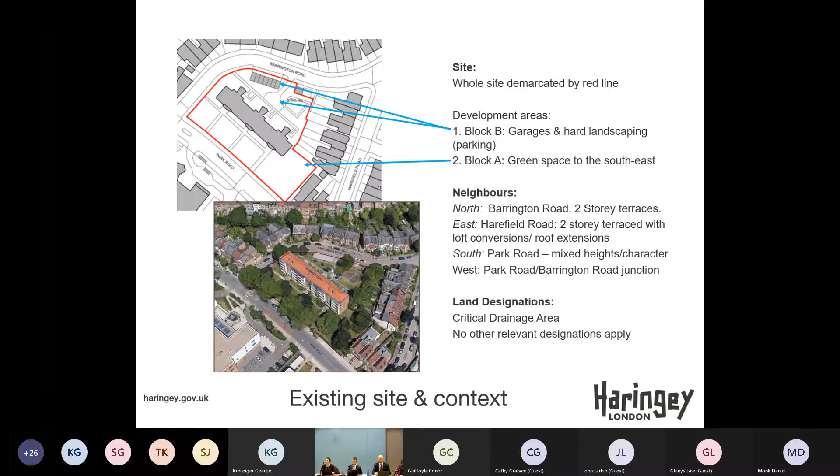In terms of planning land designations, the site is in a critical drainage area, but there are no other relevant designations.

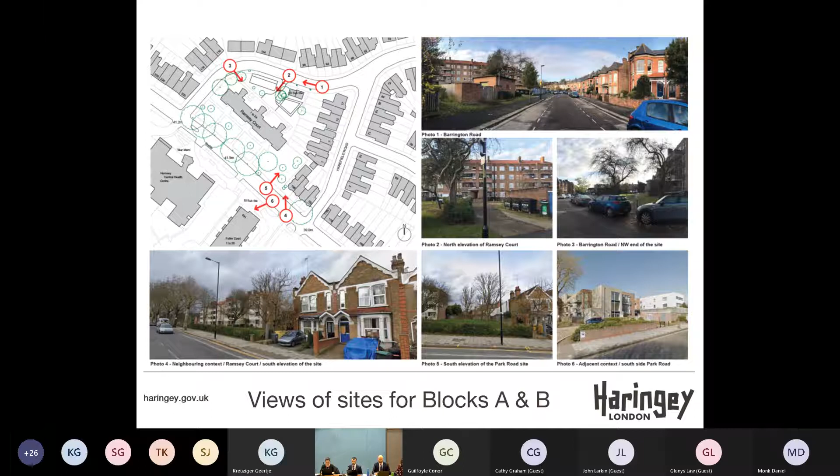On this slide, you can see a view of different aspects of the site, demarcated corresponding to the numbers. The image on the bottom left shows the view from Park Road adjacent to number 186, looking towards the end of Ramsey Court. The image on the top right shows the garages in the foreground and Ramsey Court in the background.

In terms of the land use principle of development, the key driver is policy DM20, which notes that there is some loss of open space. However, the site is not a designated open space in the local plan in planning policy terms. That means while it is an estate landscape amenity space, it is not protected open space in terms of parkland and so forth. The loss of open space must be balanced against the qualitative gains for the site and the Ramsey Court residents.

These gains include the siting of the new block and its communal garden, which provide an open and flexible space with multifunctional potential, a safe and usable play space with sitting spaces, sensitive to the remaining open space, so the scheme avoids harm to the character and function of the wider estate.

It provides increased landscaping cover to the rear — by that we mean the access lane, the parking spaces and the hard standing, which will be grassed over compared to existing. It also provides biodiversity and ecology gains, and would involve improvements to the boundary planting for the neighbouring Harefield Road residents. On balance, in terms of DM20, the scheme is considered to comply with its aims.

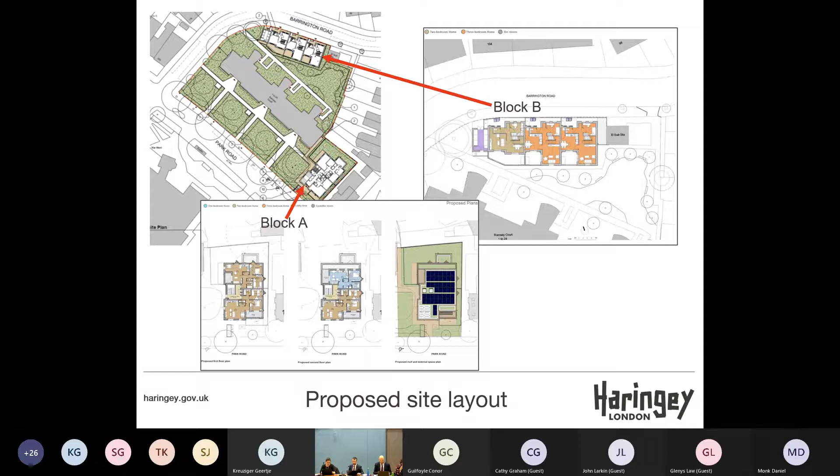The scheme represents a contextual design which responds to the existing character in terms of building scale, form and materials. It has been subject to a lengthy review and testing of various design options with officers, and the standard of accommodation complies with, and in many cases exceeds, the relevant space standards and so forth.

Block B, to the bottom right, shows that the scale, the typology in terms of its height and pitched roof, its architectural features and its materials reflect the housing along Barrington Road. Block A, on the left of the drawing, shows the step in scale between Ramsey Court and the adjacent terrace of number 186.

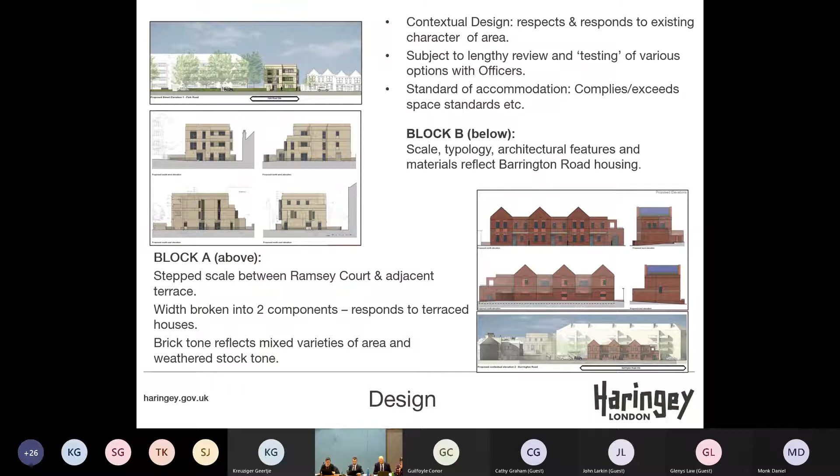Its width has been broken into two different components on the left and right side to articulate it and to relate to the housing adjacent, and the brick tone reflects the mixed varieties of the area and the weathered stock.

In terms of the housing mix, tenure and quality, the scheme comprises 9 homes. 7 of these would be affordable social rent. Block A would be 100% social rent, comprising 2 1-bed, 3 2-bed, and 1 3-bed ground floor wheelchair accessible unit.

Block B, comprising 2 market sale houses and 1 social rent house, will have 1 2-bed and 2 3-bed, 5-person houses. The mix will be mostly 1 and 2-bed units, but this is acceptable given its location near Crouch End town centre, served by public transport routes and within walking distance to amenities. It would contribute to much needed housing, particularly in the social rent sector and for family-sized units too.

The size, mix, tenure and quality of accommodation is acceptable, meeting the relevant planning policy standards. All units have external amenity space, and the scheme would introduce improved communal grounds for existing and proposed units.

One of the key aspects of the scheme is the landscaping, trees, ecology and biodiversity. The scheme would involve removal of 9 trees, categorised in accordance with British standards: 3 category B and 6 category C. The council's tree officer has assessed the scheme, and while some trees are category B, overall they are not considered of particularly high value compared to what is proposed.

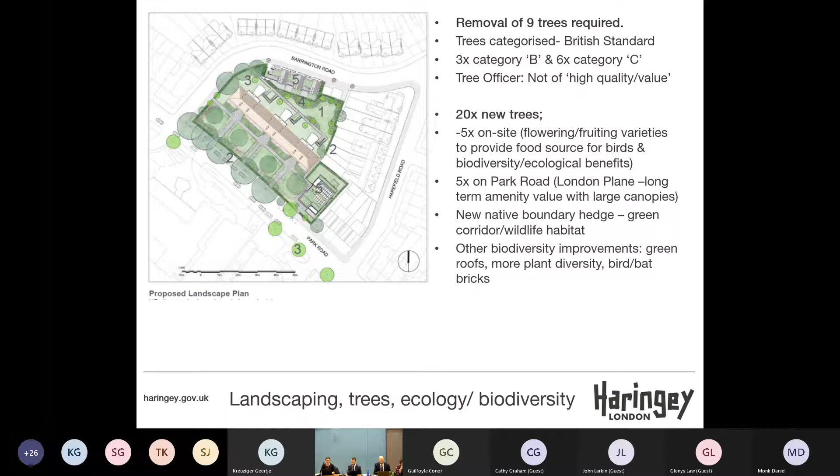The proposal outlines a scheme for 20 new trees - 5 along Park Road and 15 on site. There is an error on that slide. The scheme would introduce some London plane varieties with high amenity value for their canopies, new native boundary hedging, and other biodiversity improvements such as green roofs, more plant diversity, and bird and bat bricks.

In terms of transport, the scheme has a public transport accessibility level value of 2 and is located within a controlled parking zone. Because of this PTAL value and CPZ location, new units would not be eligible for car-free restrictions, where we would remove eligibility to apply for a resident permit. The scheme is alongside bus routes on Park Road and near Crouch End town centre.

At present we have 10 existing car parking spaces, comprising 7 in garages and 3 marked out spaces, including 1 accessible space. Under the proposal, the 7 garages would be lost to houses and those spaces removed. The 3 marked out spaces would also be removed, but the 1 accessible space would be re-provided on Park Road, in addition to 1 additional new Park Road accessible space to cater for the ground floor flat in Block A.

Car ownership census data shows the predicted parking demand for here is 7 vehicles. A parking stress survey has been undertaken to determine capacity for displaced parking and demand for new unit parking. In total, the produced parking stress, comprising the lost garages and new units, is between 81 and 101%. This is the worst case figure because not all garages may necessarily be occupied and used for parking at the moment.

This figure also includes an assessment based on vehicles taking 6 meters to park on the street, as opposed to a reduced distance which is more common. The actual stress is likely based on a shorter 5.5 meter parking space length, giving a stress figure in the region of 90 to 91%. This is still above the 85% threshold considered to comprise parking stress, but it is acceptable on balance due to real life demand.

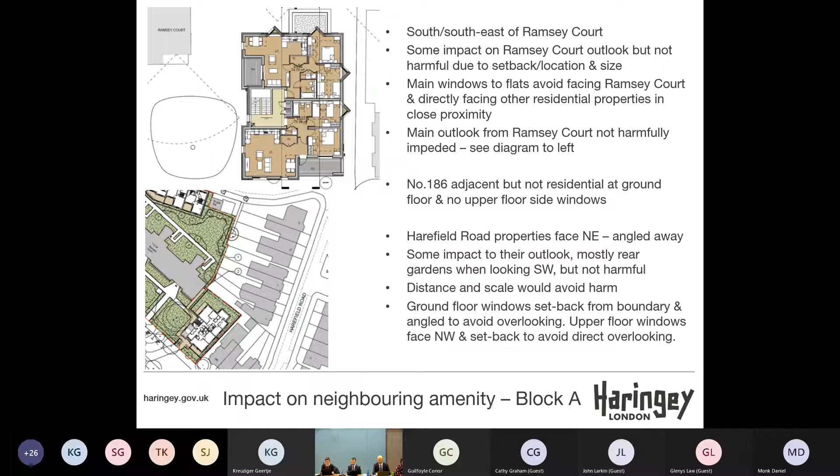In terms of Block B, these two-storey properties would have some impact. The main impact would be on the Ramsey Court residents. In terms of Barrington Road, the distance and the scale would avoid any amenity harm. In terms of the Harefield Road properties, the properties will be between 16 and 28 metres from the rear gardens and rear building lines of those properties, which would avoid harm.

In terms of the Ramsey Court residents, there is already an existing pedestrian parallel path between the new proposal and the Ramsey Court block, which serves the block and runs parallel to them. The closest distance between Block B and Ramsey Court would be approximately 10 metres, but the rest of the block would be angled to pull away from those windows, meaning that most building and windows would be between 12.5 and 22 metres away. The ground floor gardens on Block B would have boundary fences to limit the privacy impacts.

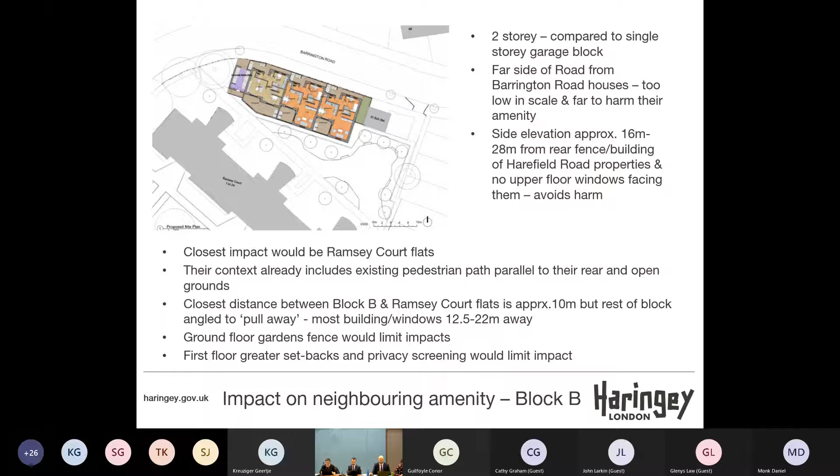The first floor would be set back. The first floor would be interspersed to be set back with privacy screening in between.

The current slide shows Block B with the ground floor gardens bounded by a fence, and the first floor including setbacks with balcony, terraces and screening.

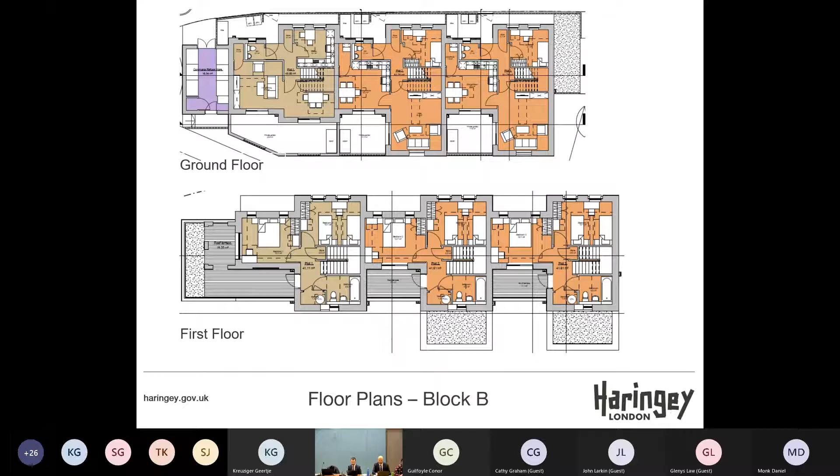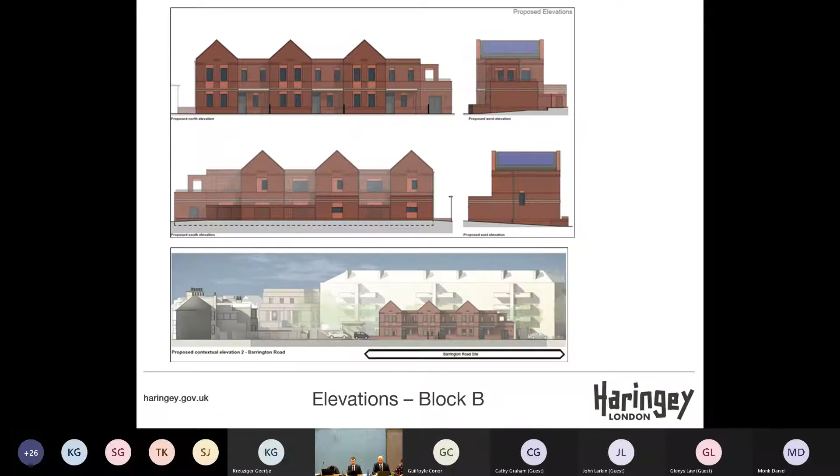In summary, the scheme would provide affordable housing for 7 out of 9 units. In terms of land use and design, the scheme is acceptable and provides a contextual response with a good quality landscaping scheme. In terms of standard of accommodation, the units have generous layouts and sizes, an acceptable tenure and mix. They meet and exceed space standards. Their dual aspect or greater, provide for good daylight and outlook, generous internal layouts, and good amenity and child space provision.

In terms of neighbouring amenity impacts, the scale, the layout and the orientation of the buildings and the windows and the distances between neighbours and the proposed blocks are acceptable to protect neighbouring amenity. In terms of transport, the traffic generation would not be materially harmed in terms of highway safety or parking conditions. Flood risk impacts would be acceptable. The scheme lies within flood zone 1, which is the lowest risk.

Other issues include air quality and land contamination. There are no unusual issues identified here, and planning conditions have been imposed to manage these. In terms of sustainability, the scheme is an exemplar scheme of net zero in terms of carbon emissions, and because of this, there will be no carbon offset required.

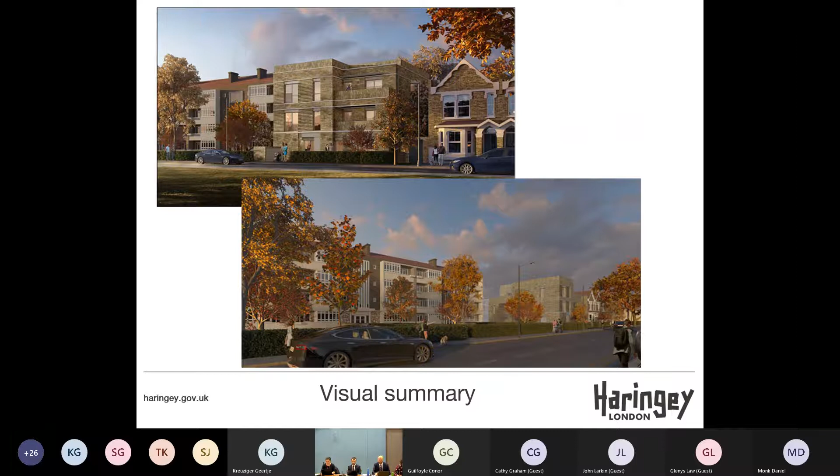And in conclusion, you can see a visual summary of Block A next to Ramsey Court in this slide. And on the following slide, you can see Block B facing Barrington Road. And so the recommendation is to grant planning permission with conditions.

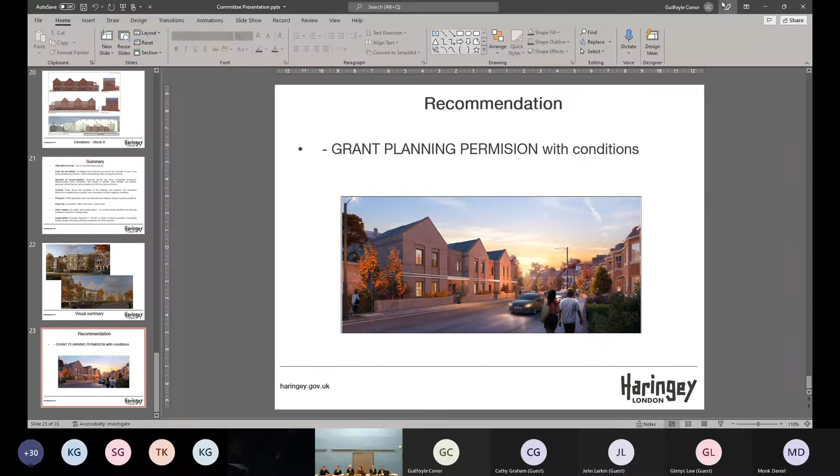Thanks, Chair. Sorry, bear with me. Yeah, so a couple of points.

I didn't really understand your resolution on the parking conditions if you're saying that the stress test is going to go up to 101% potentially, but there's going to be no material difference. I can't get my head around that. It also sits right on the boundary of a CPZ and no CPZ, so I'd like to understand what the stress test actually covered. Was it a radius around the site, or was it the particular CPZ that the site just falls within?

Also, I don't think you referenced, but in the pack, I think it makes reference to daylight impacts on the units and that they are outside what is deemed guidelines acceptable. So if you could potentially comment on that as well.

Also, it says that it's flood risk zone 1, the lowest. This area flooded twice in the summer quite severely. It sits on a culvert. I don't understand how it can be risk 1 when the council knows full well that it floods.

So what provision is being put in place with this development to mitigate that, beyond what seems like very basic drainage measures that would be in any other development? That's it for now, thanks.

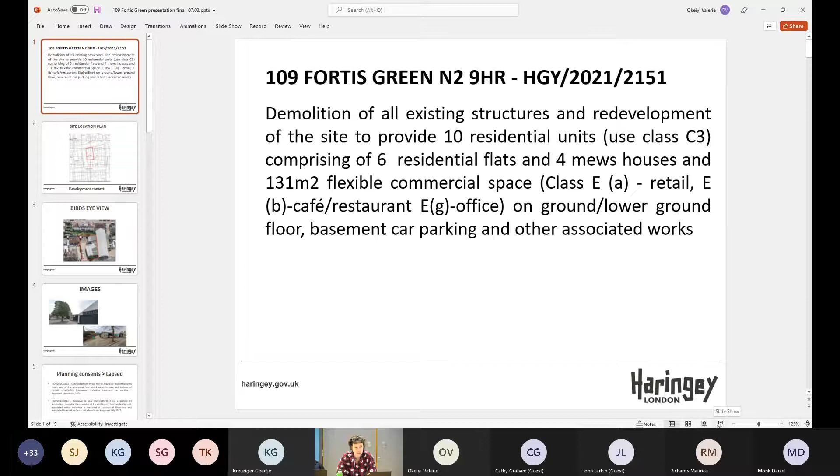Thank you. Okay, Ms. Okeiyi, over to you to present. Good evening. The proposal is for demolition of all existing structures and redevelopment of the site to provide 10 residential units, comprising 6 residential flats and 4 mews houses, and 131 square metres of flexible commercial space on ground and lower ground floor, basement car parking and other associated works.

This is the site location plan. The site is highlighted in red, and the site is located within the Fortis Green Conservation Area.

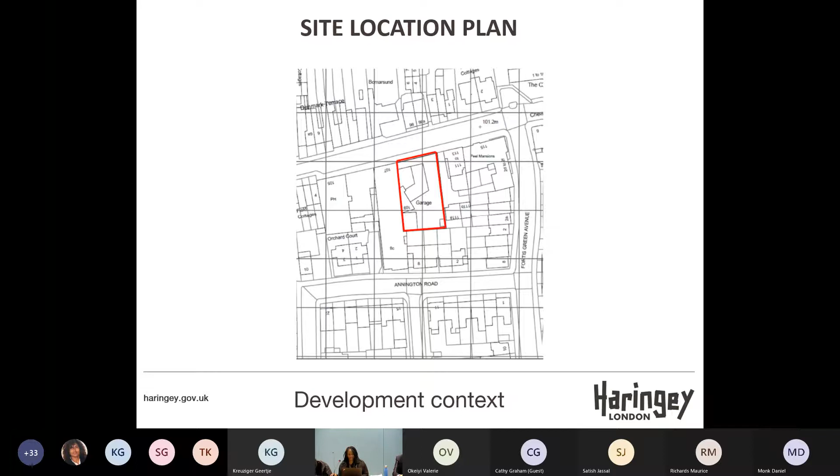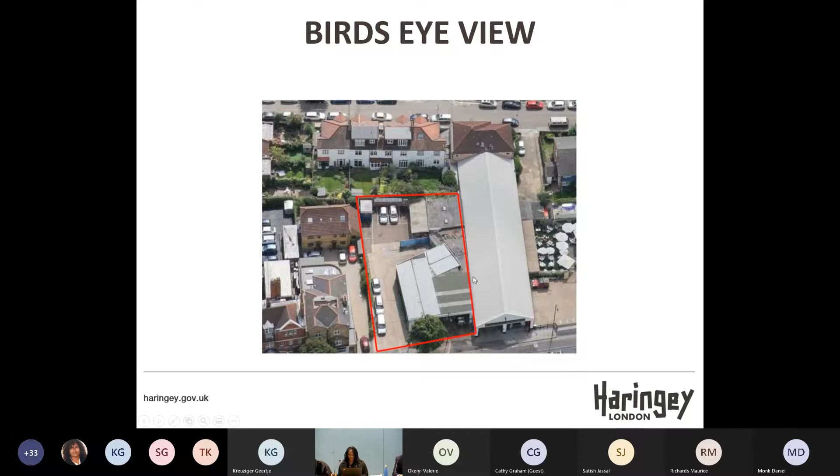This is a view of the site from Fortis Green Road, or Fortis Green, sorry.

Planning permission was previously approved by the Council's Planning Subcommittee in September 2016. This was followed by a minor revision to this approved scheme that was granted in July 2017. Neither planning permission was implemented, and both have now since lapsed.

The current proposal, which is almost identical to the last permission, is for 10 residential units, 5 family size units, a financial contribution towards affordable housing within the borough, 131 square metres of flexible commercial floor space, 10% wheelchair accessible units, private communal amenity space provision comprising gardens, balconies and child play space, landscaping, disabled parking provision, cycle parking and electric car charging points.

The changes since the last permission approved in 2017 include minor changes to the internal layout of the commercial unit, Mews Houses and Apartment 1, a reduction in the commercial unit floor space by 22 square metres, external changes to the front and rear elevation of the main street facing building, minor changes to the housing mix, and a financial contribution towards affordable housing within the borough.

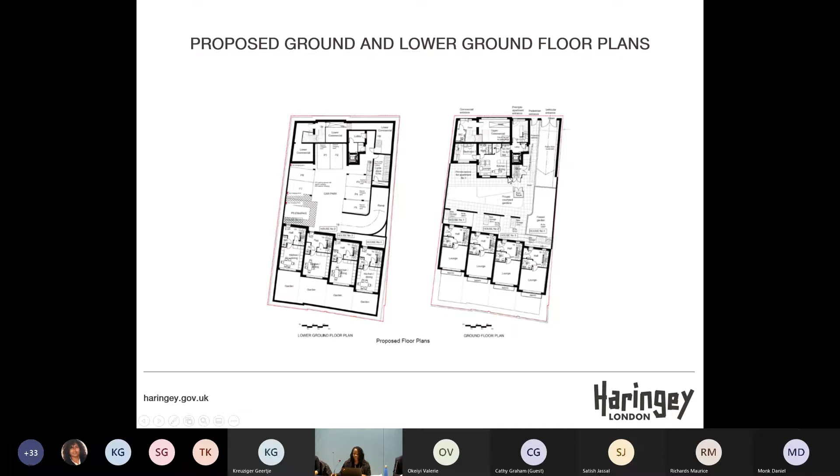This is the ground floor plan to the right, where there is separate access to the commercial unit, residential flats above, and Mews houses to the rear, private courtyard garden and recycling and refuse area.

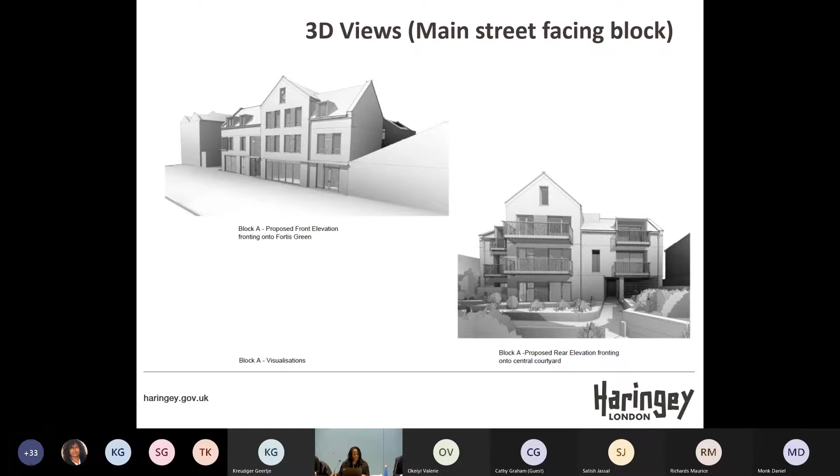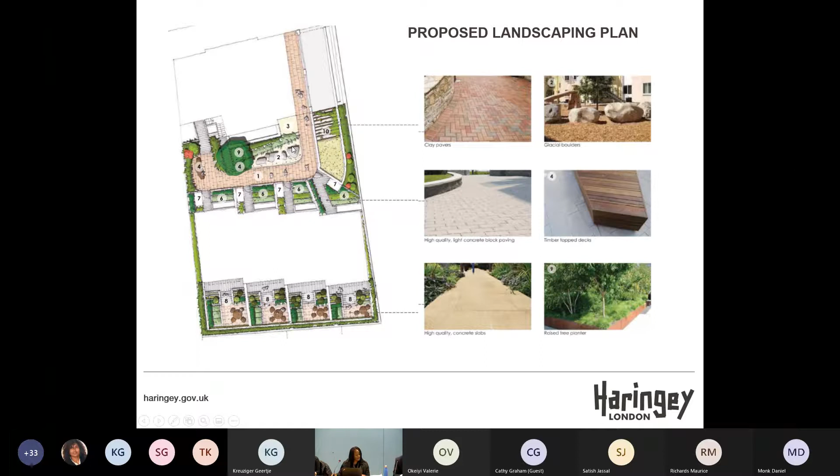Officers consider that the changes to the proposed scheme in comparison to the previous approved development are minor, and the change in policy context does not affect the assessment of planning merits of this proposal. The proposed scheme also provides a financial contribution towards off-site affordable housing provision within the borough, where the previous scheme did not. Accordingly, the proposal is recommended for approval.

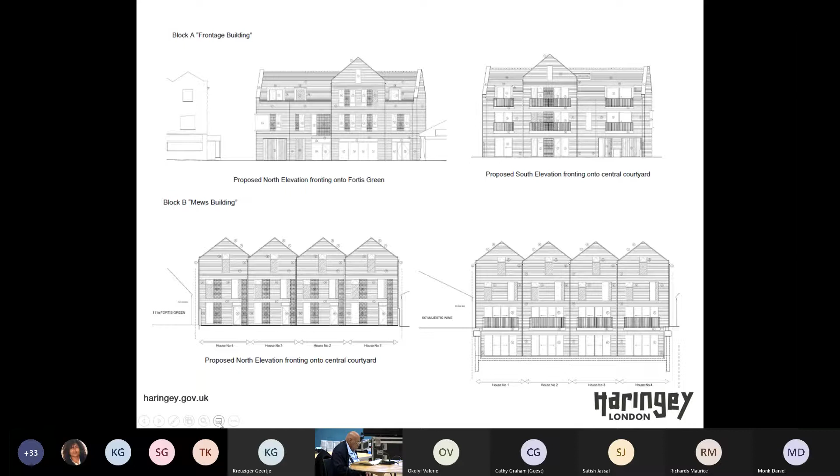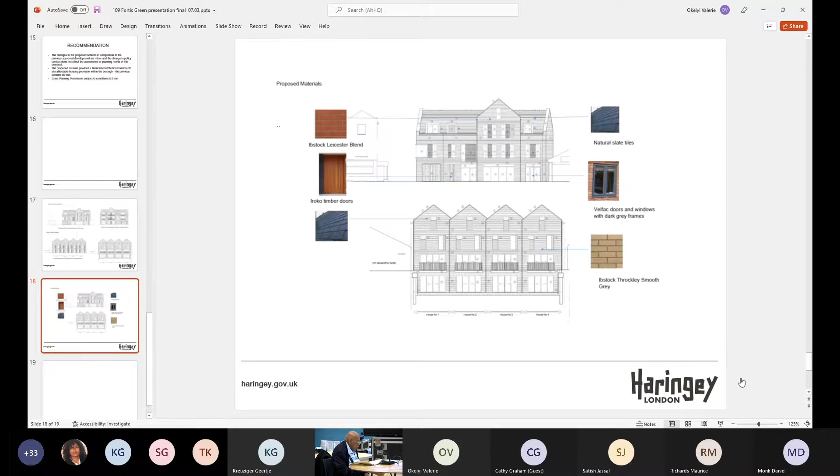I'm concerned about the proposal to give, is it 200 and something odd thousand, as a contribution to development outside that particular geographical area. We get this from time to time. Why is it that council housing is not supported in places like Fortis Green, but pushed to some other part of the borough, mainly the eastern part? Because this is really what's behind this policy. You simply don't build enough units in a development such as this, and then you say, oh well, they can go elsewhere, take this little money with you and get out the way. It is, in my mind, not acceptable.

I suspect the officers have got nothing to do with it. It's really a matter of policy which the council has laid down, not strictly within their tenure. But I'm appalled with this. I was involved in the previous development that granted permission to the police station, and the same thing happened there. You don't get a full share of the cake. You say, well, go elsewhere and take this money, you can do what you like with it. Not good enough. We should be able to provide adequate housing from a development such as this, which has shared tenancies from people from this side of the borough as well as the west side of the borough.

Mr. Krzyszowski: Thank you, Chair. I can confirm, as the Chief Planner, we do control how we spend Section 106s across the borough, and we can spend Section 106 money for affordable housing in the west of the borough as well as the east, and that will quite possibly be the case with this one as well. We do spend it on smaller schemes in the west of the borough, and on buying properties that can be used for affordable housing as a net increase in affordable housing. So contributions in the west of the borough can be put to good use for new affordable housing, and I make sure that Section 106s are spent appropriately.

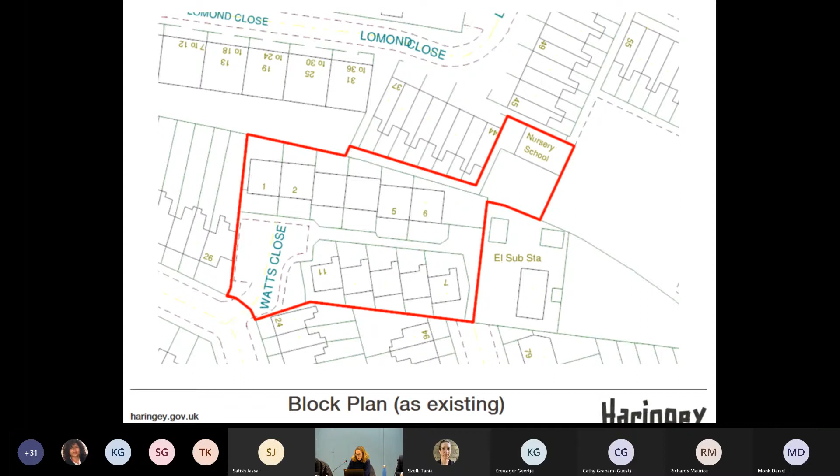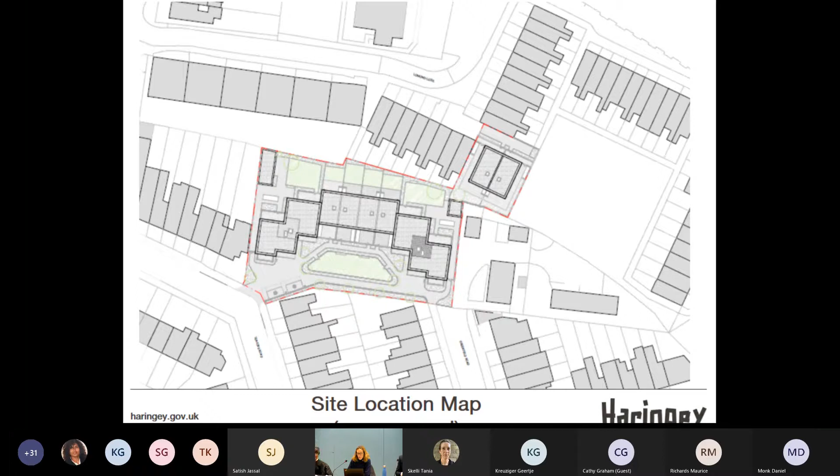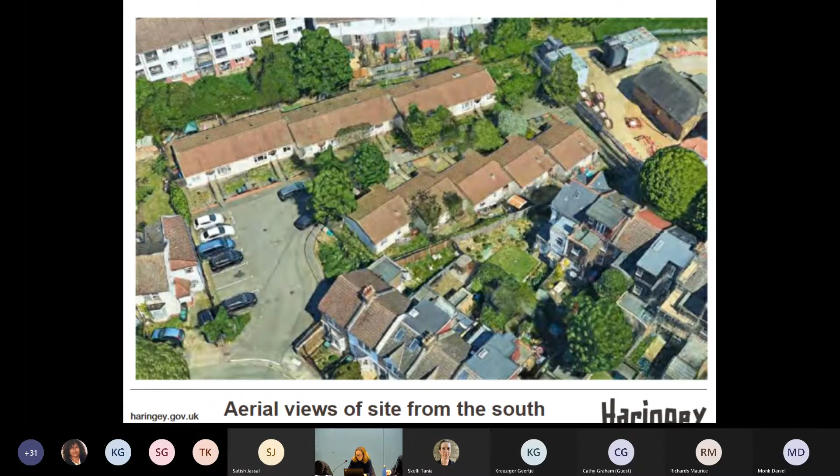This is an aerial view of the site looking from the south, onto single-story bungalows accessed from the vehicle entry on Seaford Road in the bottom left corner. The community hall would be in the top right corner, just off this photo.

The main issues covered under this proposal are the principle of the development, design and impact on the character and appearance of the surrounding area, landscaping, public realm, amenity and play space, housing mix, tenure and quality of accommodation, impact on neighboring amenity, transport, parking, waste, recycling and servicing, and sustainability, energy and climate change.

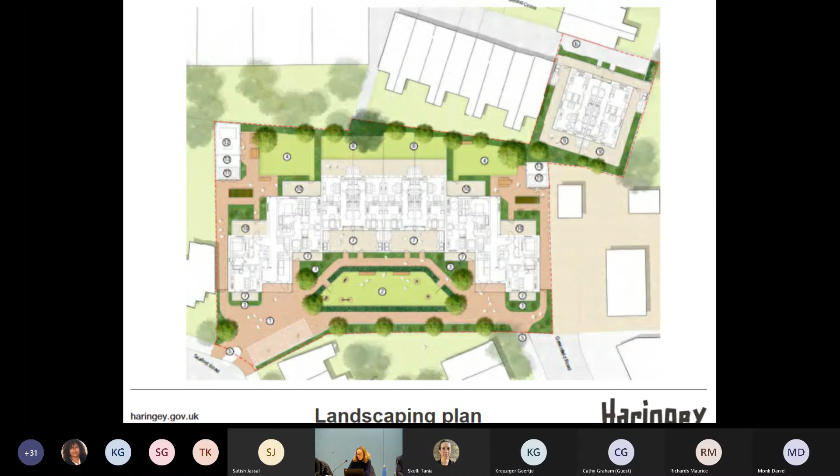Landscaping and public groundworks to complement the building are proposed, along with tree replacement. In front of you is the landscaping plan, with communal shared space to the front on the south, and at the back some communal outdoor space as well as private gardens to the townhouses. The pair of houses to the northeast have their own shared private gardens as well.

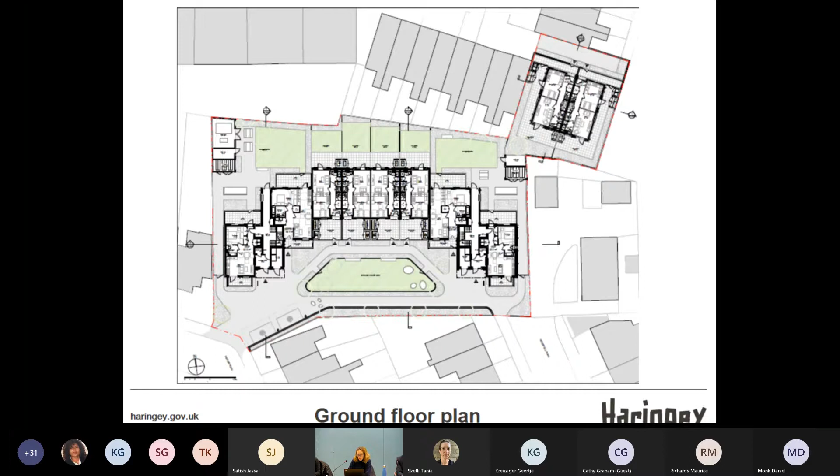This is a floor plan of the ground floor level of the entire development, with cycle storage and refuse storage shown within the ground floor, cycle storage at the back and sides, and for each individual townhouse as well. This slide shows the main access points.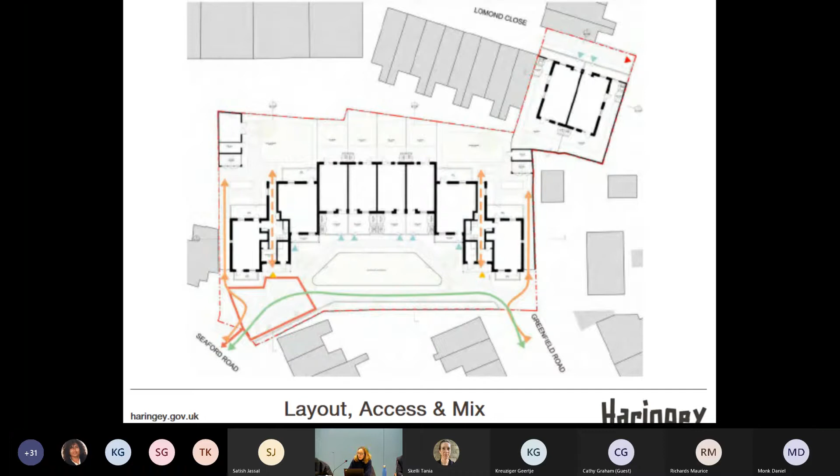The pair of new houses instead of the community hall to the northeast is accessed from Lomond Close, and the main mix of flats and houses is accessed from Seaford Road by car for deliveries and the two accessible parking bays, with pedestrian access as existing still provided from Greenfield Road.

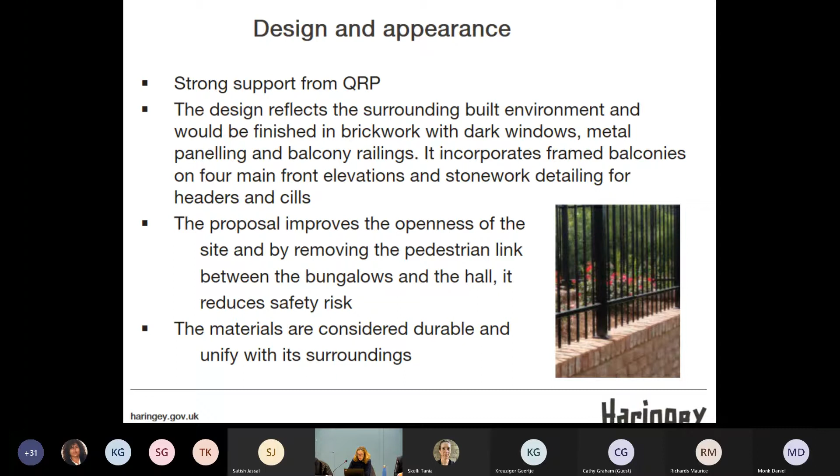The proposal has received strong support from the QRP. The design reflects the surrounding built environment and would be finished in brickwork with dark windows, metal paneling and balcony railings. It incorporates framed balconies on four main front elevations and stonework detailing for headers and sills. The proposal improves the openness of the site by removing the pedestrian link between the bungalows and the hall, thereby reducing safety risk. The materials are considered durable and unify with the surroundings.

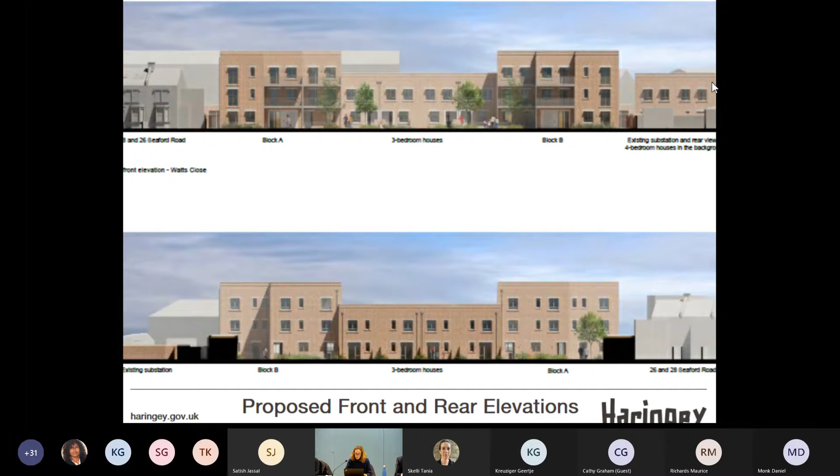These are the proposed front and rear elevations of the main section, with the 2 pair houses on Lomond Close shown with the rear in the right corner.

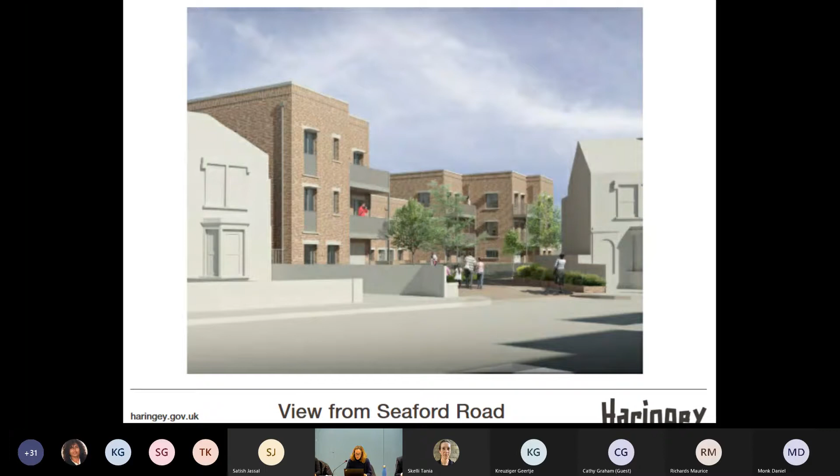This is a 3D view from Seaford Road onto the front elevation of the main section of the development.

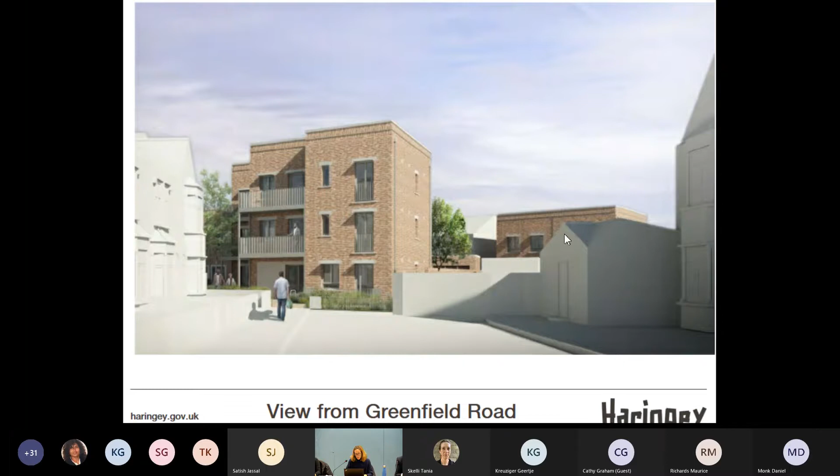This is showing the development from Greenfield Road, with the substation to the right and the rear of the Lomond Close buildings behind.

This is showing the frontage of the proposed buildings on Lomond Close.

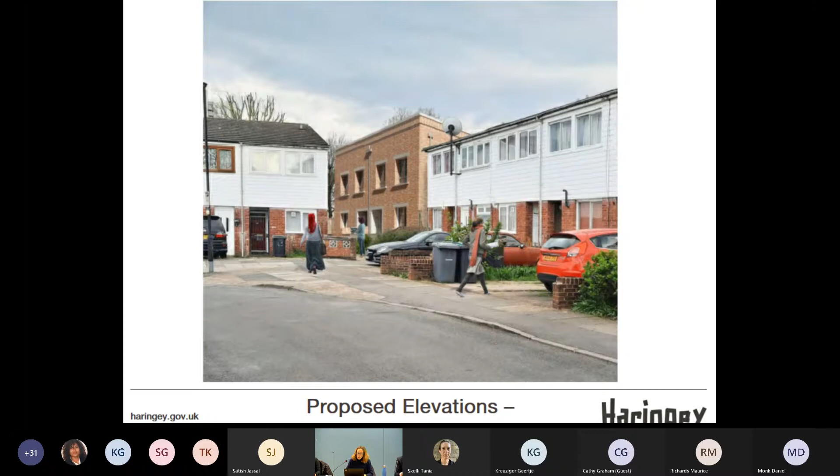With regards to landscaping, the development includes 1 new play area to the front of the site, private gardens, communal gardens, improved pedestrian zones, limited vehicular access, and improved community safety.

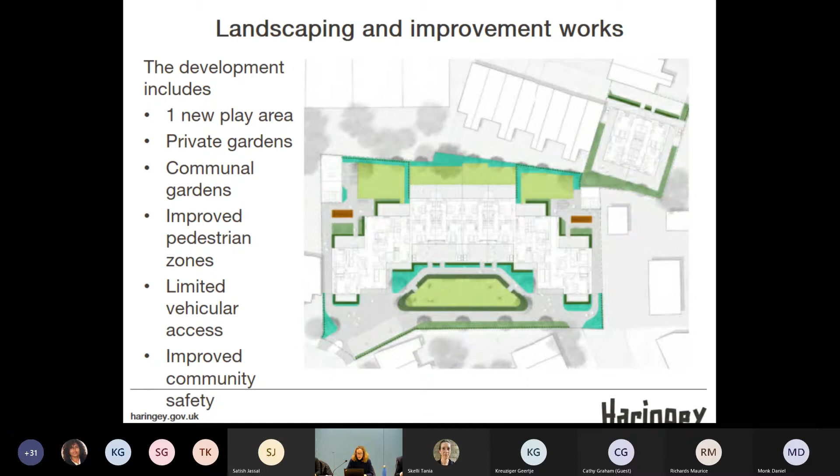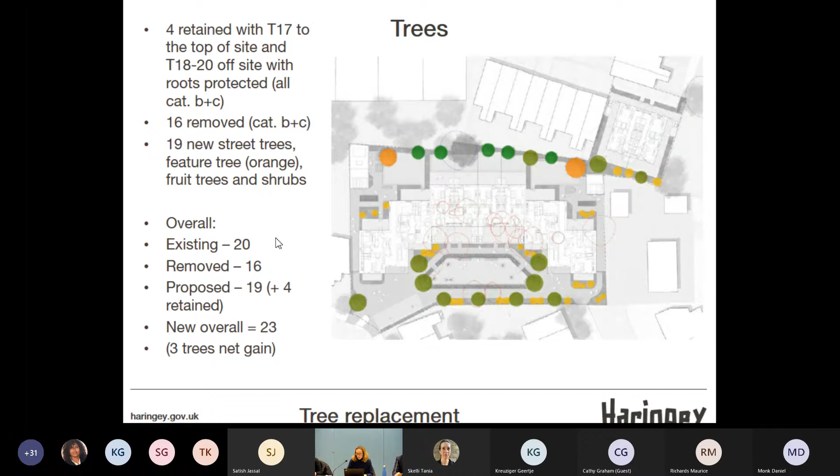With regards to trees, 4 are retained, with T17 shown in grey to the top north part of the site, and T18 to 20 off-site, just off-site, with roots protected. 16 trees are proposed to be removed. 19 new street trees, fruit trees, and shrubs are proposed. This results in an overall gain of 3 trees and 23 overall.

A daylight and sunlight assessment in accordance with BRE guidelines was submitted. There will be no unacceptable harm to living conditions of neighbouring residents. The development responds to its surroundings with suitable heights, window orientation, larger windows, and obscuring where required.

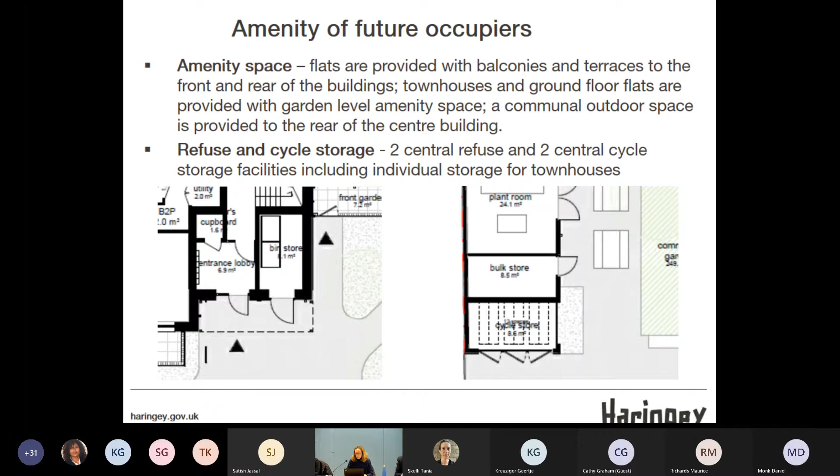The flats are provided with balconies and terraces to the front and rear. Townhouses and ground floor flats are provided with garden level amenity space. A communal outdoor space is provided to the rear of the center building. 2 central refuse and 2 central cycle storage facilities, including individual storage for townhouses, are included.

In terms of energy, sustainability, and drainage, the proposal will achieve the GLA's zero carbon target through on-site means. No carbon offsetting contribution is required. The scheme is designed to include cross-ventilation to all flats, and will utilize rooftop solar panels to provide renewable electricity, with living roofs for biodiversity and cooling.

It is designed to reduce surface water runoff rates through the use of SUDS. It uses permeable paving, locally sourced materials, individual air source heat pumps, thermal insulation, and trees for shading, and reaches a 0.52 urban greening factor level, which exceeds the minimum.

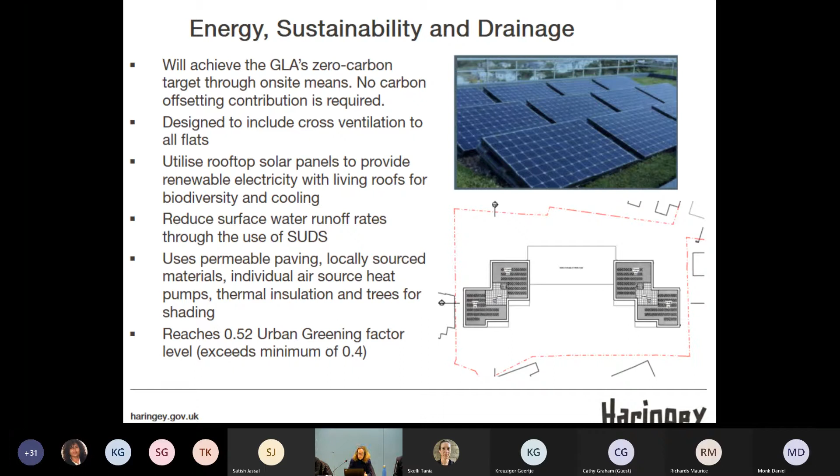Otherwise, a lighting strategy and secure by design certification is aimed for and proposed. The site has good public transport accessibility and is in a CPZ.

Retention of pedestrian access from Greenfield and Seaford Road with a single vehicular access is designed into the scheme. There are 2 blue badge bays and electric vehicle charging points provided on site, and the scheme is to be secured as car-free via a Section 106 legal agreement.

As such, the proposal is recommended to be granted planning permission subject to conditions and legal agreement.

Thank you. Thanks. Any questions on the report? I've got Councillor Morris.

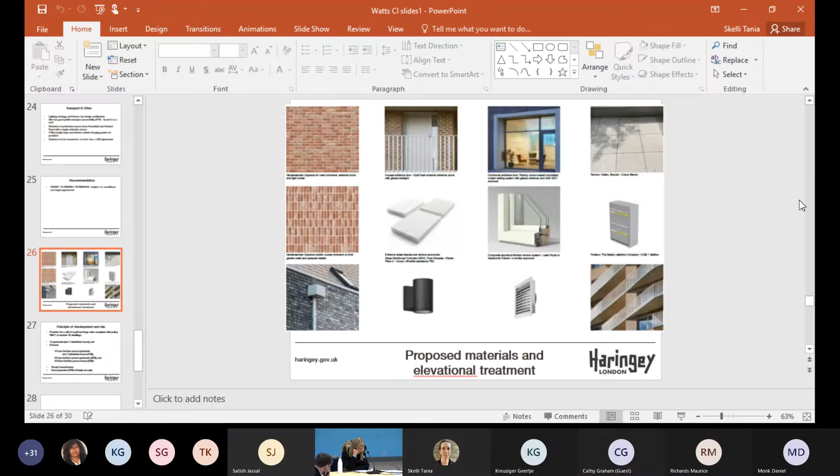Thank you, Chair. I just wanted to ask about the block on Lomond Close. The buildings there, the houses there, have a particular style - from memory, brick on the ground floor and slatted wood on the upper floor. You did touch on it in the report, but I was wondering why there wasn't an effort to make that block more in keeping with Lomond Close. I think the report said they wanted to keep everything on the site looking harmonious, but obviously the site's a very odd shape, and the Lomond Close block looks as if it belongs to Lomond Close, but the design of the building doesn't really fit with the close.

I think the idea was to provide one style for the whole development. The quality of design on Lomond Close is varied and not as consistent, and the idea was to provide a really high quality design with durable materials that look modern, and therefore it was decided to have the same material for all the development.